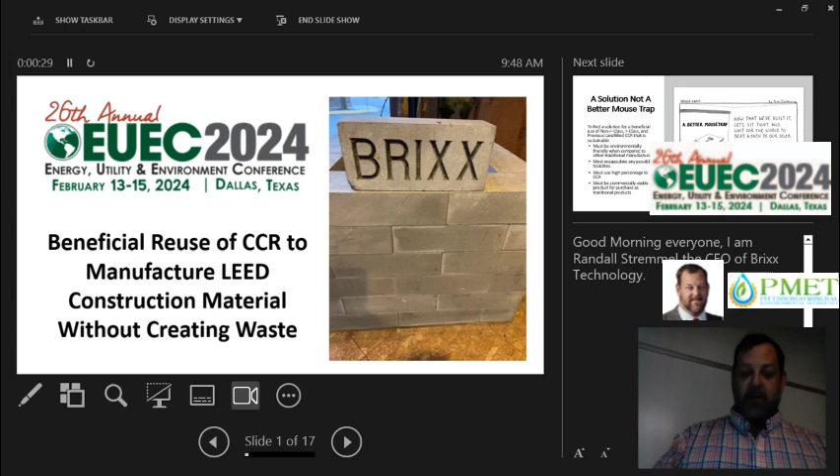Sounds pretty exciting. So when we first started this journey, we were looking at this as an environmental thing. We're not just here to build another mousetrap, right? We don't want to build a better way to burn off carbon. We actually want to come up with a real solution. We want our solution to be environmentally friendly. We want to produce as minimal amount of CO2 and use as minimal amount of energy in our process.

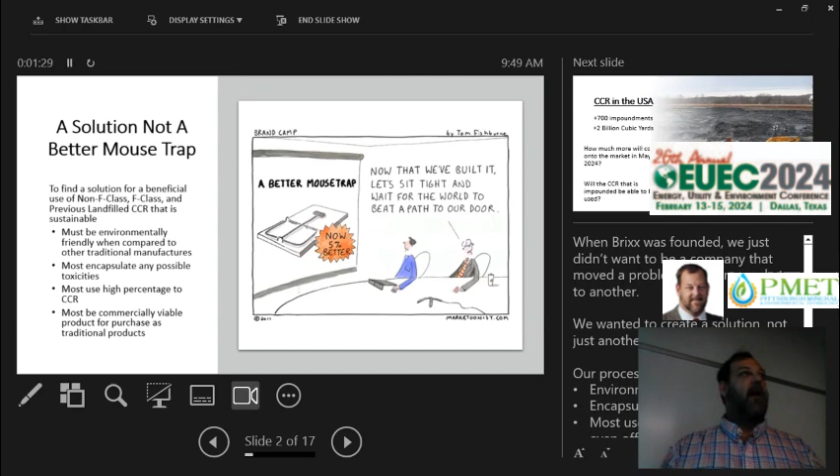To be part of that environmentally, we want to make sure that we encapsulate. So if there is any kind of toxins or any kind of nasty stuff in the fly ash, however it got there, mercury, arsenic, whatever, we're going to encapsulate that to make sure that our final product doesn't leach into the ground around it. And we also need to make this solution to be financially viable and to make a product that we can sell.

You guys probably know this more than I do. 700 plus impoundments, over 2 billion cubic yards. How much is going to be coming back onto the market in 2024? We still don't know, and will we be able to use the impounds?

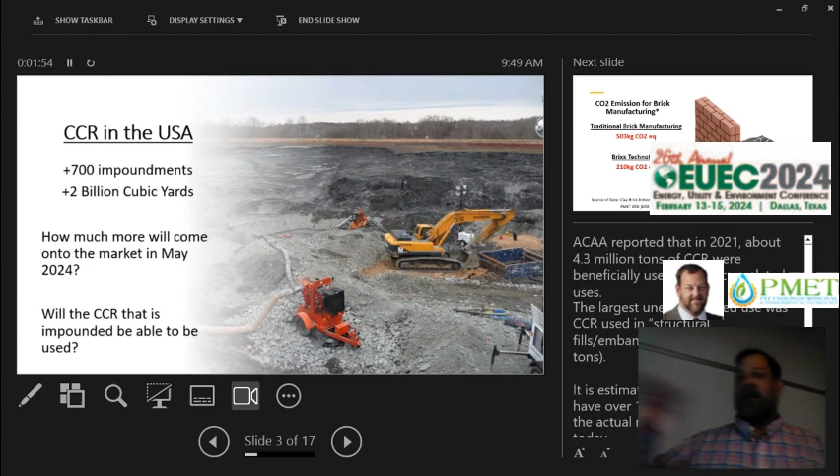So just kind of looking at some of our technology here. I like to call ourselves a remediation manufacturing company because we're remediating, but we're also manufacturing a product that we sell on the market. One of those is a brick or paver, any kind of shape.

In our process, we're going to be compressing the material, the feedstock down. When we do that, it's almost the exact same kind of process that a brick manufacturer uses. We change out the kiln there to make it more environmentally friendly.

So that's why you can see that our CO2 is under half of what the traditional brick manufacturing business does. And then for every cubic meter of bricks, 503 kilogram CO2. And then just for a little reference too, concrete is 900 kilograms of CO2 when manufacturing concrete.

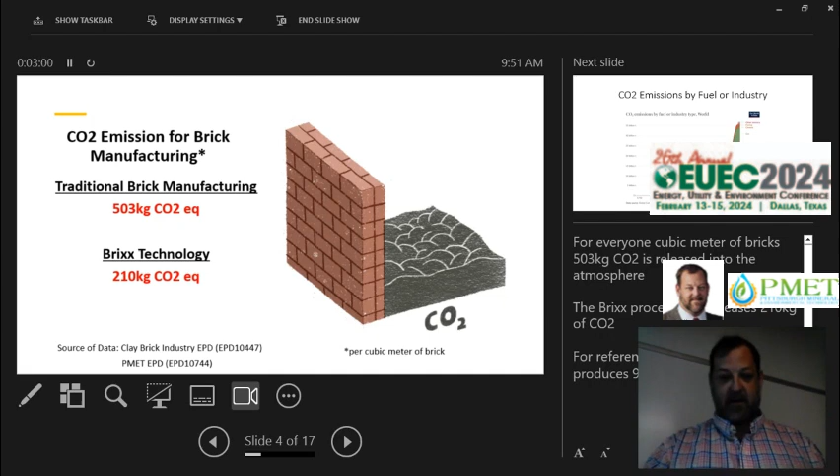Here gives a nice little chart. You can see, oh, he's got the pointer right here. Okay, let's see if I can. I'm sorry, I'm trying to figure out how to use the little pointer thing. Oh well, oh, there it is.

Okay, so other industry, flaring, oil and gas, we all know about that. Cement is right up here. Coal is down here. And then we're going to take fly ash and we're going to run it through a kiln to burn off the carbon and dry it. So now we're just adding on more CO2 to this to add into the cement, which is going to far out exceed everybody else on the market.

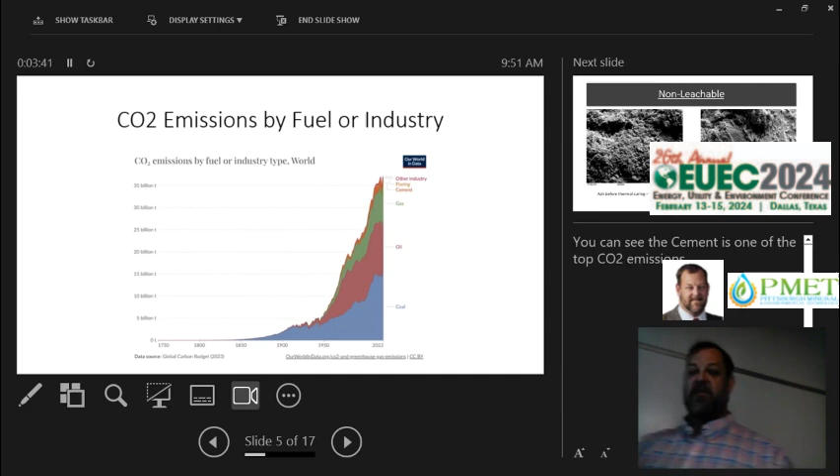So looking at the CO2 and understanding that we're producing far less CO2 than your normal brick and block and aggregate and cement manufacturers. So that kind of gave us that.

The other process is the encapsulation. So this is a 2000X SEM image of fly ash before a thermal curing process. During that process, we use 100% CCR. We add in 2 little binders to it, and then we run it through a thermally curing process. And in that process, we create crystals, and you can see all these flat surfaces here of growth. And those crystals, which is called tobermorite, that actually will encase and encapsulate anything in there.

So let's say there was mercury in there. That is now encapsulated. It will not leach into the ground. If you were a mason and you cut that and you breathe that dust into your lungs, it processes right through your body just like any other dust would. It doesn't leach into your system.

This is another way to make sure that we are environmentally friendly and making sure that we're not leaching any kind of things, because as we all know, we're on an uphill fight with everybody. Everybody thinks that we're polluting the grounds and all this stuff like that. So this is one of our ways to be able to show that we're not going to be producing, or we're not going to be leaching into your surrounding grounds or waterways.

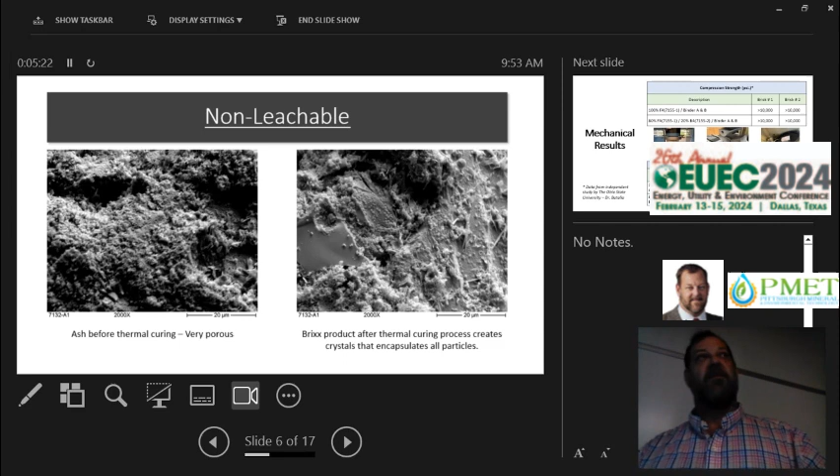I don't know if anybody's dealt with Dr. Butalia from Ohio State. He's kind of a fly ash guru. If you ever go to WOCA, he's on the board, sharp guy. So what we did was we used Ohio State's laboratory to perform third-party testing of our products.

We used 100% fly ash for this one. We've got over 10,000 PSI for compression, bottom ash, and fly ash. We're over 10,000 on those two. For reference, a red brick is 3,000 PSI. Your heavy pavers, which you can use for parking lots and stuff like that, is 8,000.

The other part of that process is the water absorption. As you can see right here, we actually did a little bit better with the bottom ash. The bottom ash is a lot more coarse, so it gives a little something more to grab hold of and to create those crystals. So we have a really low water absorption here, which is another mechanical requirement for your pavers.

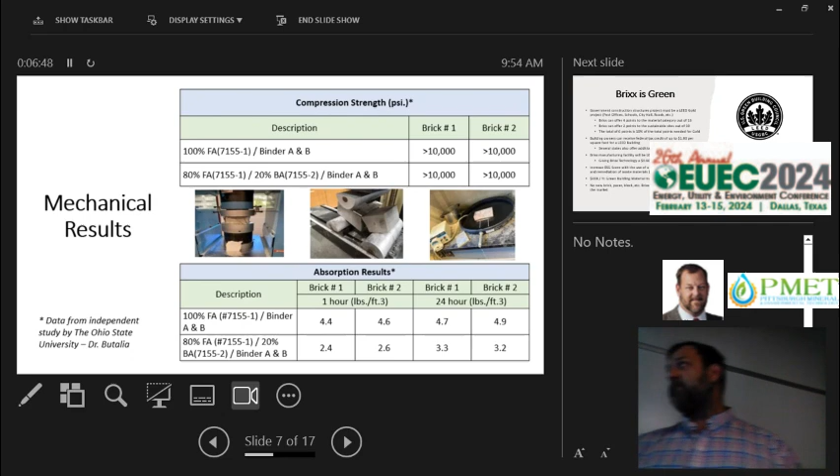Bricks don't really have an absorption rate for your house, but the pavers do freeze-thaw.

So then we went out and presented our findings to the Green Building Council here. We're able to offer 4 points for a LEED Gold project, and then 2 more points for the sustainability site. That's a total of 6 points, which is about 10% of your gold points that you need to accumulate for your project. Here's some other federal tax incentives and stuff like that.

They're roughly estimating a $68 billion per year green materials market in the United States. There's really not anything out there for a masonry product or any kind of cement, and we're hoping to change that.

So our initial pilot plant, this is actually in the back of our warehouse. We were able to get a grant from the Pennsylvania DEP to prove out our process and theory on a large scale process.

We sampled from 8 different power plants throughout the eastern Ohio region, the western part of Pennsylvania, and down into West Virginia. We ran all their products through there. We took in the stuff that was impounded, the stuff from landfill. We didn't use any fresh ash for this process, because the fresh ash right now is already competitive with cement, and we're not really wanting to compete in that space.

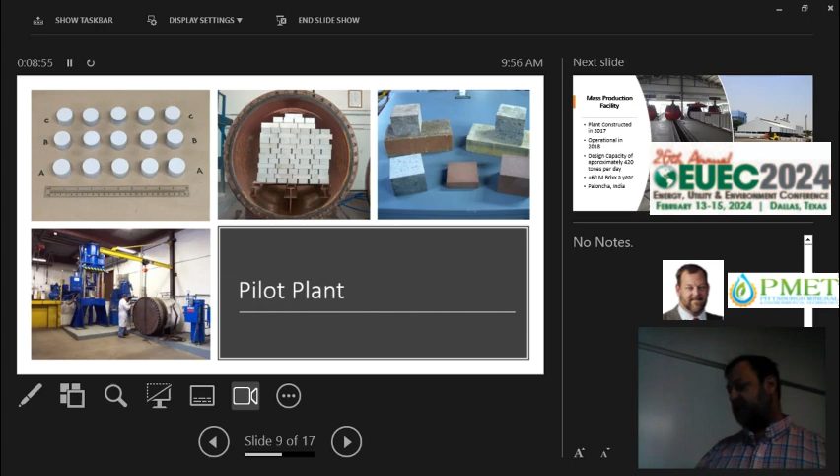We want to provide a solution for what's already been landfilled and how to get that out and clean closure sites. In this process, we've proven out our technology on all of these sites, the materials, and patented the technology. Our first manufacturing facility went into operations back in 2018.

It is in India. The plant does 60+ million bricks a year. This is our bricks facility here. The company actually was a steel manufacturer. The steel manufacturer needed better power. The grid there was a little bit wonky on them, so they built their own coal power plant.

Then the Indian government came in and said, no, you're no longer allowed to landfill any of that. That's when they approached us. We helped design the facility. It's 420 tons per day, 60+ million bricks. So that's roughly right at almost 2 million tons of fly ash that's been beneficially reused.

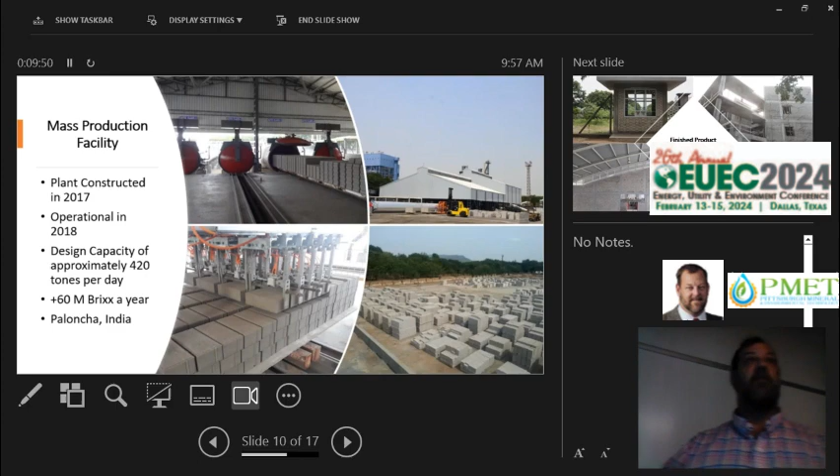Here's some examples. This right here is an apartment. This is a vocational school here being used. Just a guardhouse coming onto the property, and then the driveway and the yard, it's all made up of the pavers from that site.

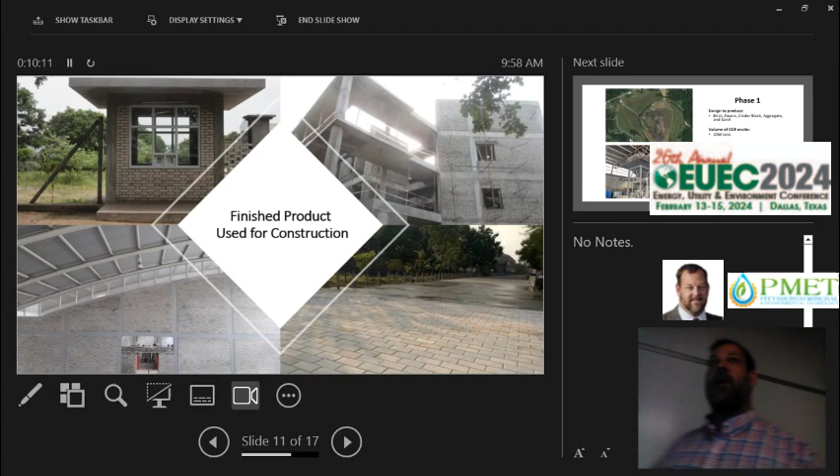So our first phase here in the United States, we acquired a 20 million ton facility in Ohio. The site has been accepting ash since '94, about 20 million tons on there. We have a plant up.

We're starting off at 206,000 tons per year, making brick, block, and aggregate and sand, and then we're making an additional 80,000 tons per year of cinder blocks. We've already received Ohio DOT approval for our bricks, blocks, cinder blocks, and aggregate and sand.

All those can be used on any ODOT approved project. As far as the aggregate, it can be used in the concrete, or it can be used as a base, either way. The Ohio EPA actually issued us the very first beneficial reuse permit in Ohio.

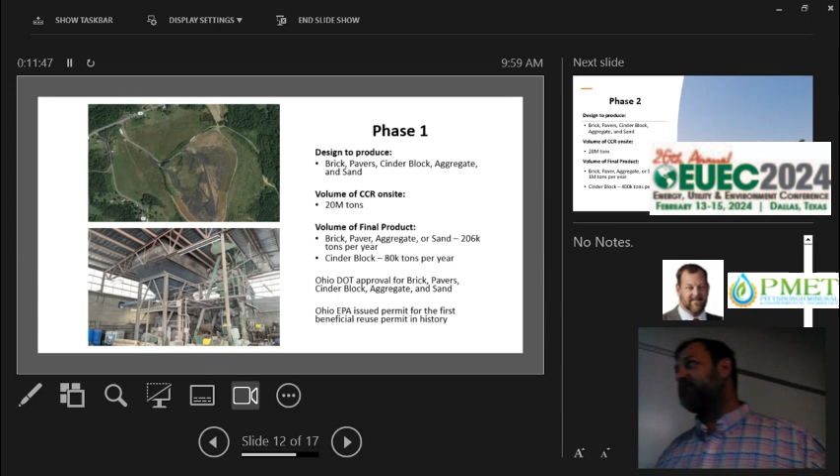They did not have a program for beneficial reuse, so we kind of blazed a trail there, and we're able to do that. We talked to our district chair with the U.S. EPA. They issued us a letter. It's very vague, they don't want to make a decision, but basically it says it looks like you've checked all the boxes for the beneficial reuse definition, which is kind of nice that they actually even did it.

Our second phase, we're going to build a brand new facility on that site with more presses and more thermally curing vessels. We're going to do 1 million tons a year, plus an additional 400,000 tons per year. On the output side, if we intake 1 million tons, we produce 1.1 million tons of product, which gives you an idea of how much CCR we use compared to our binders.

We don't use any other things like sludges. If I screw up a line of product and it doesn't meet the mechanical requirements, all I have to do is take it, crush it, and send it right back through my process, so I'm not producing any waste or air pollution. We've had our thermally curing process checked by the EPA along with universities to verify we're not putting out any NOx, SOx, or anything like that. Our process is very clean - it's just our binders plus the CCR material, press it, thermally cure it, and we're done.

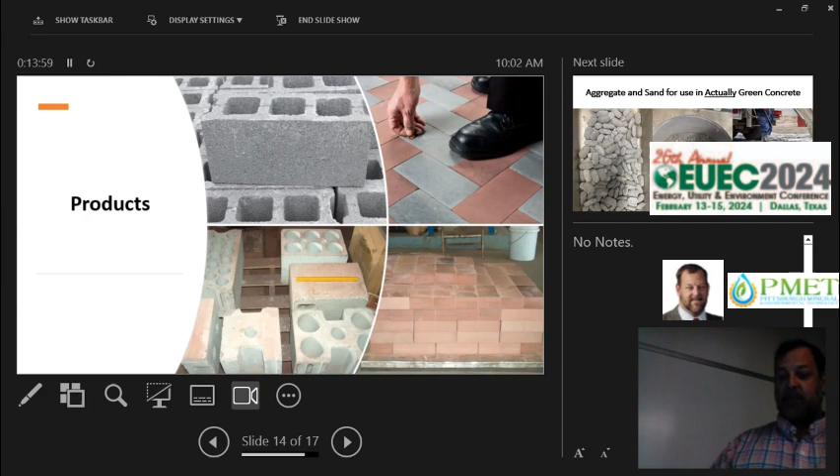Our other product is aggregate. We'll be producing aggregate and crushing it to the size that the concrete company or whoever needs. These are just some quick lab samples. We'll be producing a 2-inch by 2-inch by 2-inch briquette, like a charcoal briquette, and then crush that down to whatever the order calls for - road base, concrete, whatever.

At the same time, when we do that crushing, we produce sand. Both our products are LEED certified. Since concrete is made up of 75-80% aggregate and sand, the concrete industry now has the ability to say they're green, and no longer just pumping CO2 into it that everybody knows is a joke. Sorry if you're a concrete company.

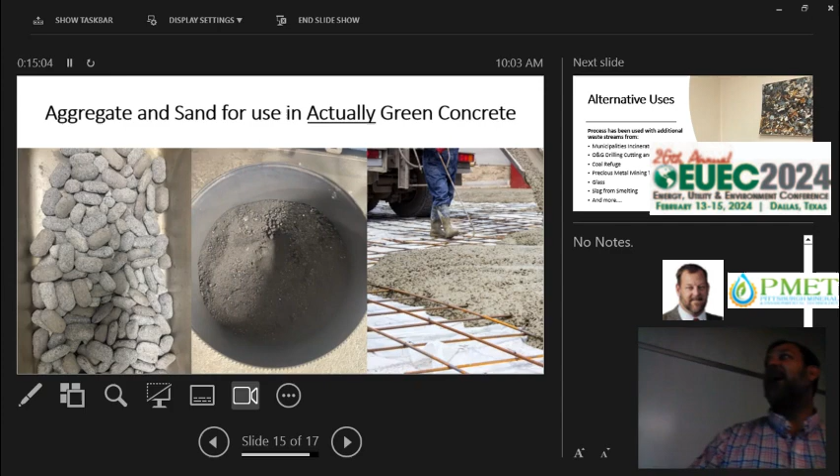Our process is pretty robust, so we're able to take in other kinds of ash, like incinerated ash. We've taken in incinerated ash from Alcosan, a wastewater treatment facility in Pittsburgh. We've also taken in oil and gas drilling cuttings from around the Marcellus and Utica area. We have another process for coal refuse, but we're able to take that in too.

LOI doesn't really scare us too much. When we get up into that 20% LOI range, that's when the material starts to become weaker, so we try to work around that - dilution is a solution. Metal tailings, precious metal mining tailings, we're able to use. Glass, slag, and several other kinds of waste we can incorporate, either mixing in with the fly ash or using it as its own dredge material.

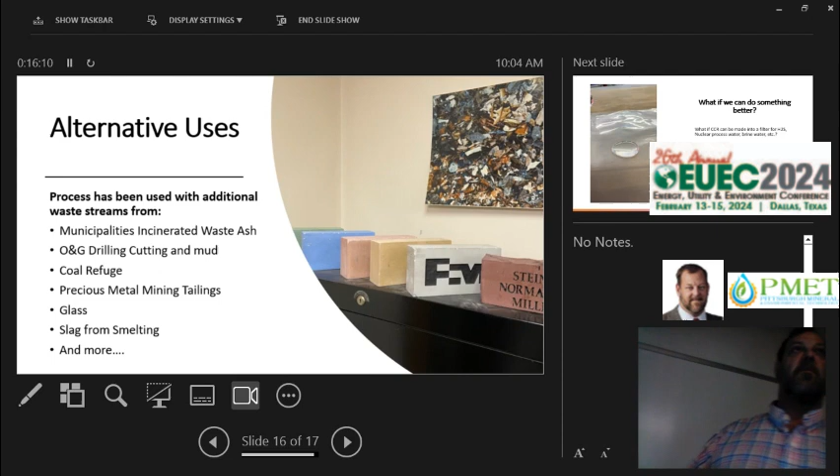We will have a plant here in Houston, Texas for dredge.

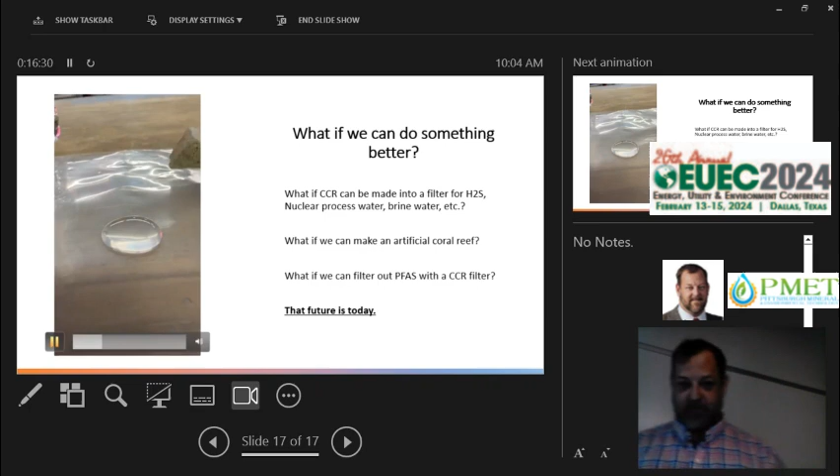This isn't really ready for prime time, but I'll give you some insight. That's just a droplet of water, and that's fly ash - so we've been able to create basically a filter, a very porous product. We can use that for lightweight aggregate, and also for linings for leachate and stuff like that to control the flow. It's all encapsulated in there.

We've also been able to prove out H2S filtration. We're in talks with a couple of nuclear power plants to use it as a filter for their process water. We're also looking at PFAS filtration using the CCR. So we're looking towards the future - right now we've got 150 million tons of fly ash under our umbrella, and we're looking for more.

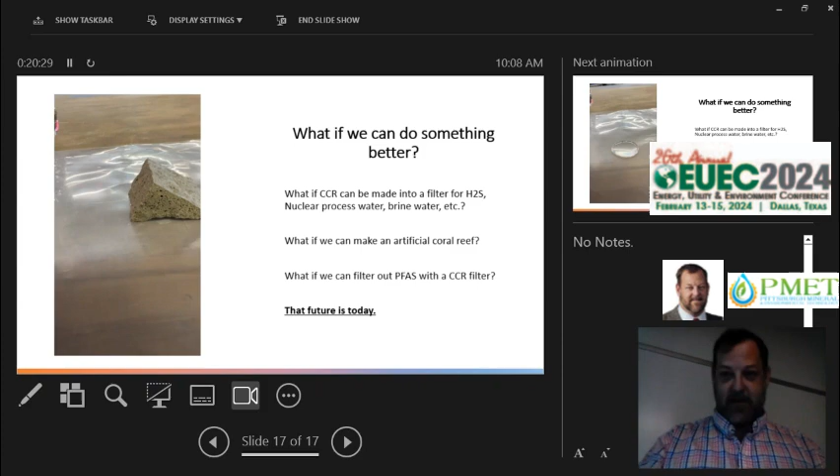Awesome. I will turn it over to the next guy.

Thank you, thank you. Apparently I'm the moderator, so I'm just saying I'm moderated. You can take as long as you want. Yeah, plenty of time. And thanks for coming back. I wasn't trying to put pressure on. You're not.

I want everybody to have one of these. You're going to find out what it is here in a minute. Some of you may already know this. I'm with a company called World Domes.

Some of you would recognize Domtec International. I already saw a picture of one of our domes on Steve's presentation in Brunner Island. So they are all over the place. Thank you.

Before we get started in the presentation, I do get the sense that I'm in the presence of a few engineers, a few scientists, which I think I'm correct in. So let's mess with your head for a minute. Sometimes these presentations, unless you're right in the middle of it, can come across as being rather inactive. So let's see if your math head works.